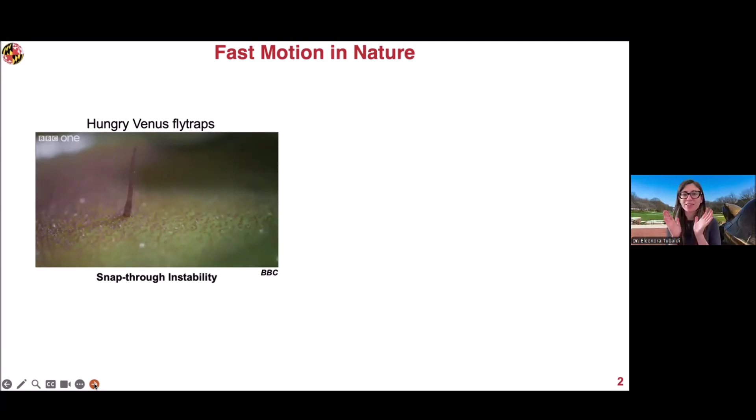So I would like to start by showing you how, for instance, nature achieves very fast motion. You might have seen a very hungry Venus flytrap that is catching its prey with this closing, locking mechanism very fast. Sometimes it's going to miss its prey, sometimes it's going to get it. But this is a mechanism that we really want to explore and try to leverage also in our designs. And this is based on a mechanical principle that's called snap-through instability. So we'll talk more about it in a second.

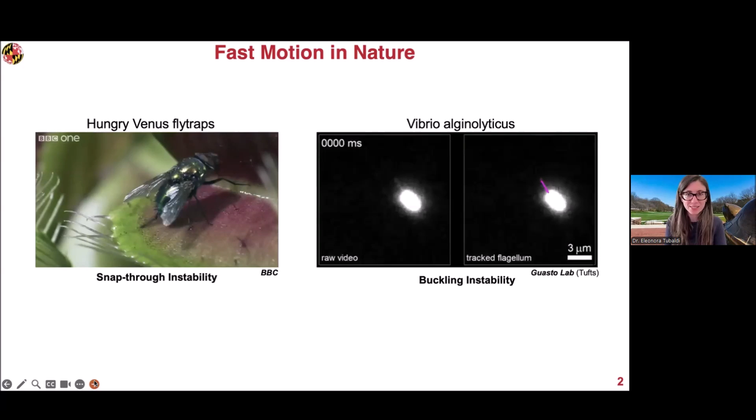And then if we scale down, we're going to look, for instance, at the Vibrio alginolyticus, where we see that this can turn very quickly, in a fraction of a second, by having this buckling instability of its tail. So nature leverages these fast reconfigurations for different purposes. And as engineers, we are interested in learning from it and including these types of principles in our designs.

So now how can we achieve fast motions in mechanical systems? If we want to use the Venus flytrap approach, like in snap-through instability, we can see a case where we push a 2D plate, and this is going to all change shape very quickly and shrink in all directions.

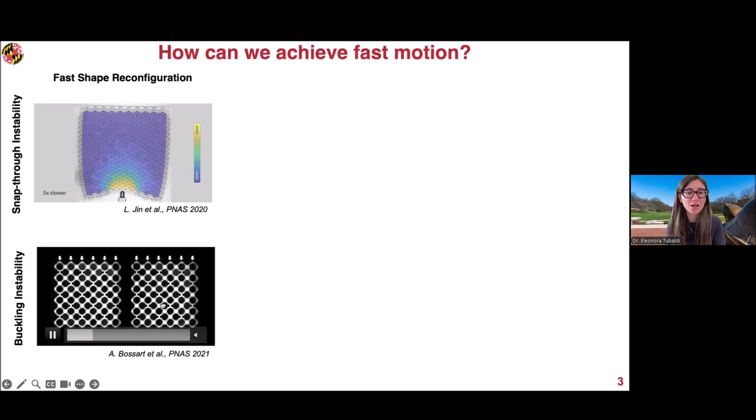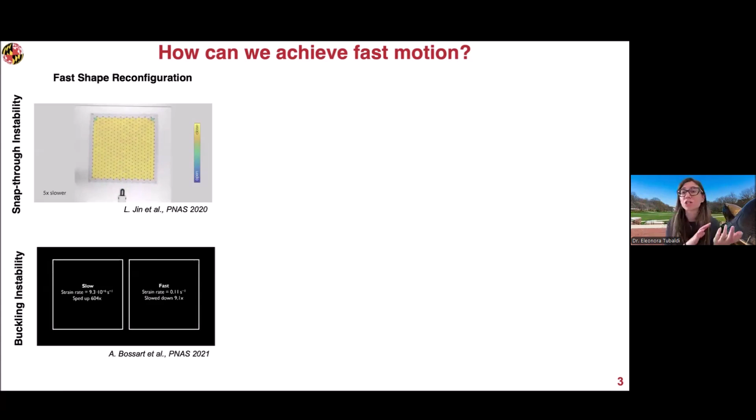Here we see another type of arrangement of materials. Once we compress it very fast, it's going to show one deformation. If we compress it slowly, it's going to change its deformation. So speed is going to play a role.

We can also include sequencing. We want to try to achieve sequential motions with very simple inputs. Here you see an origami robot, where by actuating, inflating and deflating it with different sequence orientation, we get to different target shapes.

At the bottom here, we see by cutting a material with pores inside, this is able to change its angle on how it's attached to the base. So friction is going to change, and locomotion can be achieved and programmed in the material. Here you see the example of locomotion of the soft robot.

We also want to achieve gentle grasping. Achieving something very fast but gentle at the same time is an important challenge we have in our designs. So we can use the snap-through instability, like we've seen in the previous Venus flytrap case.

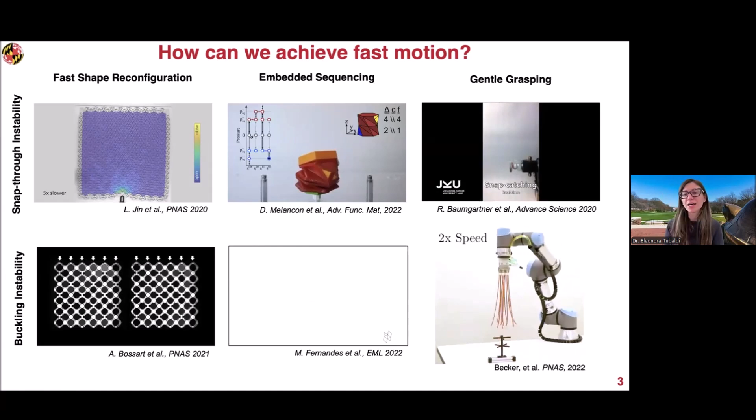And also buckling for this curly type of grasping task, where filaments are actuated upon deflation, and they all curl because they are not symmetric, so they bend one way or the other, and this enables achieving different touch points and grasping complex objects.

So we see that this gives us a lot of possibilities in the design of shape-changing materials, embedding sequencing, and gentle grasping. We would like to advance the research and the field in all these different areas.

So we ask ourselves, for instance, how can we achieve this programmable shape reconfiguration by leveraging a principle in geometric frustration? We're going to see in a second what I mean by that. We would like to achieve sequencing capabilities.

So when we inflate a material, it looks like a balloon, but it's an intelligent balloon. It's something that once it's inflated, is going to be able to trigger different touch points and interact with different objects. And then we want to achieve also gentle grasping.

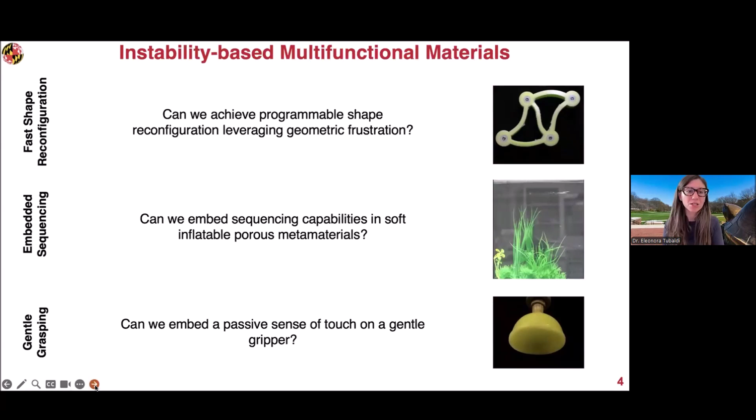And while we're grasping an object, we also would like to sense, to learn something about the object. So we're going to talk about these three different projects to give you a flavor of what's going on in our lab.

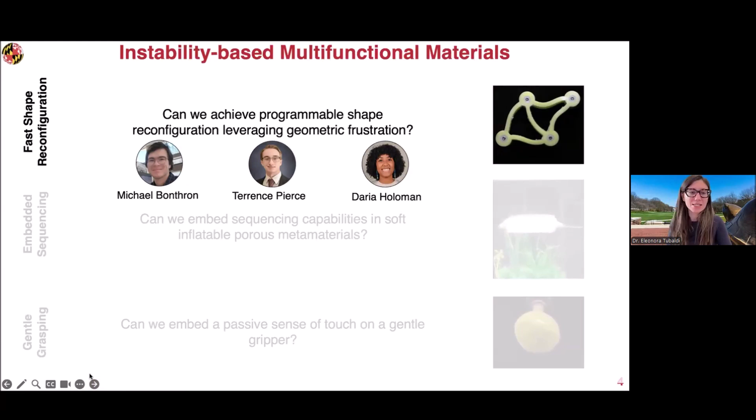In the first topic, we have three students working on it: PhD students Michael Bonthron, Terrence Pierce, and Daria Holoman as an undergraduate student. So now, what is the snapping I was talking about that the Venus flytrap uses?

It's like storing energy, like we can do when we eat an apple, and then we want to run. In the same way, it's like when we compress a spring and then release it all of a sudden. There's a lot of energy stored there.

And this is going to give us a fast reconfiguration. It's the same thing when we have a ball at the top of a hill. We give it a push, and it rolls down, changing its potential energy from when it's high up on the hill to when it's down the hill.

So we can use the same principle in designing structures. If we start with a flat plate, it doesn't have any potential energy. When we start compressing it, now we see that we have two minima where the structure wants to be, either up in this case or down in this other case.

So how is it transitioning from the top to the bottom configuration? It's going to go through an unstable state. You see here this shape that is like a sine shape, going up and then down. If we look at the potential energy here, we're higher up, and then we go down to the other minimum.

So this basic principle, we leverage when we combine multiple of those plates. This is what we call metamaterials. Metamaterials are materials whose properties emerge from structure rather than composition, meaning that depending on how I combine these different plates, I'm going to get different shapes.

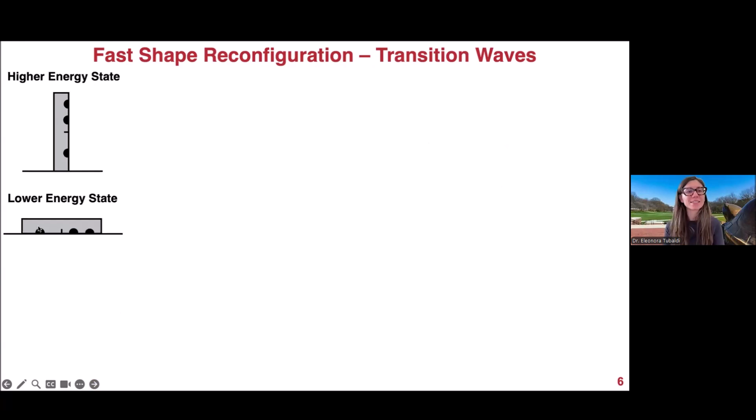For the fast shape reconfiguration, we said we're going to have a high energy state, let's say in a vertical position, like if we think about the domino, and then a lower energy state when the domino is going down. So what's happening from the potential energy perspective? When our domino is standing up, this is a higher minimum. It needs to overcome an energy barrier, increasing the potential, and then fall down into the lower energy state.

What happens if we put one domino next to the other? There's going to be a chain reaction. We push the first element, and all the others are going to fall down in sequence. If we look at the energy profile of each single element, once the first one falls down, the second one starts falling, and so on and so forth.

So we want to embed this chain reaction, this shape-shifting mechanism, into our system. People have studied this, for instance, with different plates combined in a 1D arrangement with magnets. When you push on one magnet, all of them trigger the response. Same with this rotating square, or with this spring-loading mechanism, where touching the structure makes it all change shape.

So why do we like this very simple actuation? Because these things can be deployed, for instance, in exploratory missions on new planets or in underwater systems.

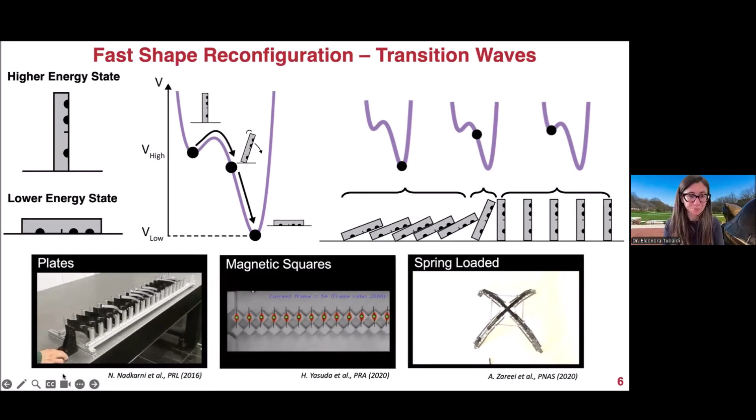What we want to do here is combine these different building blocks, these different dominoes, blocked in different arrangements. They can all be asymmetric, like the one we showed, domino up, domino down, or they can all be symmetric, like the plates I was showing in the initial snap-through.

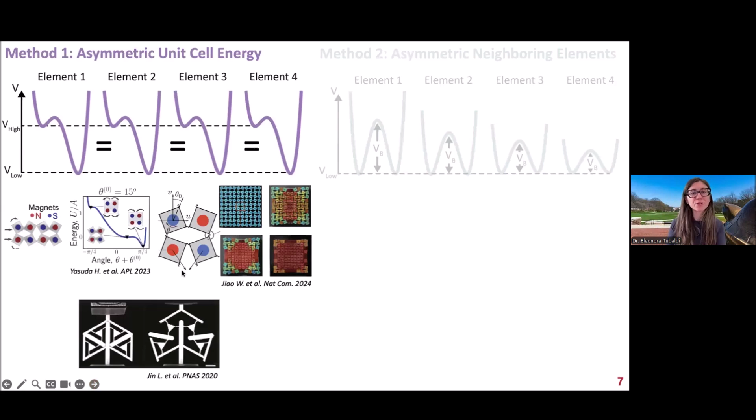So what is the difference? In the first case, we go from a configuration up to a configuration down. In the other case, we have this gradient, where the energy barrier, the amount of energy needed to jump from one state to another, decreases. And we have different examples for all of them.

Now, what are the drawbacks? In the first case, we need to have this asymmetry in the energy wells. In the second case, we need a finite size, because overall we keep decreasing our energy barrier, and eventually we won't have these two stable states anymore.

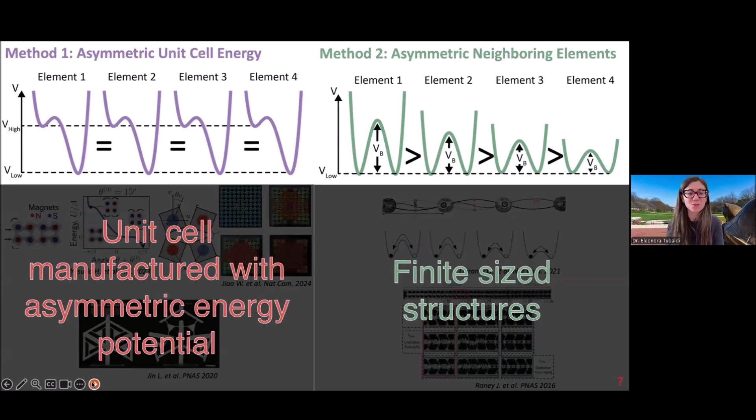So then we introduce this concept: can we use the arrangement, and in particular geometric frustration, to transition from one stable state to the other?

We start with our buckled beam, the beam that we compress, and then we arrange it, tessellating it into triangles. Triangles are very peculiar, because we can have one beam that's up, one beam that's down, and the third beam doesn't know what to do, because it's feeling these different constraints.

The same thing happens in the reconfigured state, where we still have triangles. And in jumping from one to another, we release energy.

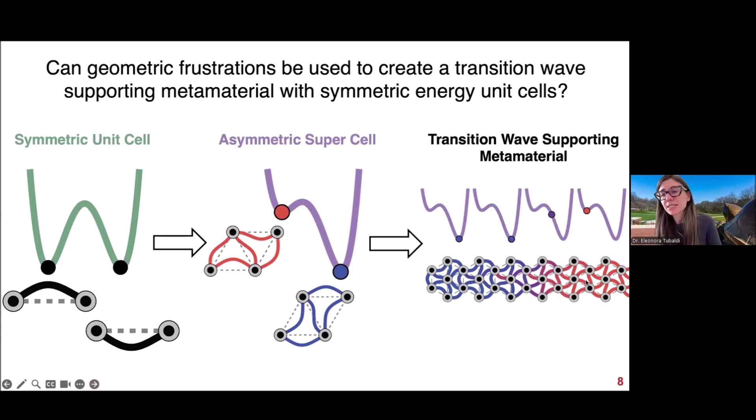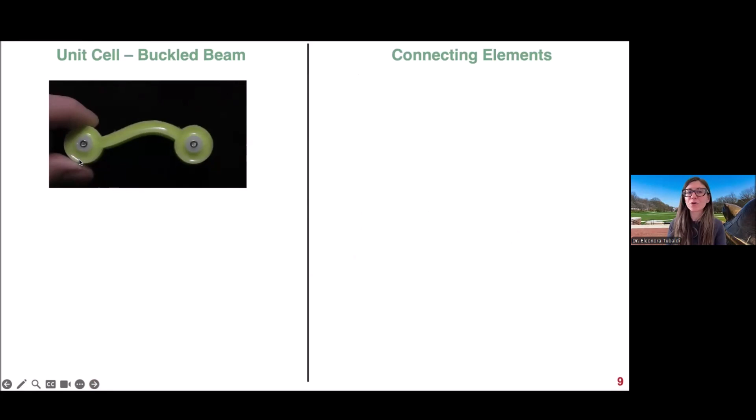So what we want is a shape-shifting material where we give an input on the first elements, and then it all transitions, like the domino effect we showed before. We start with our beam and see how, by rotating on one end, it jumps from one stable state to the other. And we see that this is all symmetric.

Now, what happens if we put multiple of these beams one after the other? We see that by actuating one, the second one follows, and we can propagate this through chains.

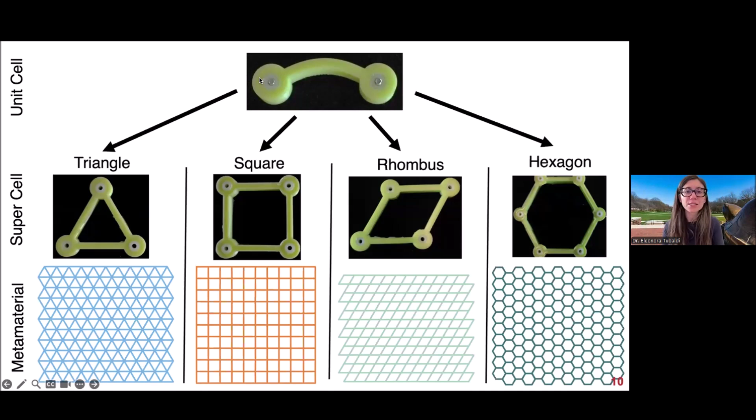So we can become really creative. The beauty of metamaterials is that everything depends on the arrangement. We can create triangles, squares, rhombus, or hexagon materials. And then when we go at the metamaterial scale and build these large networks, we can have all different arrangements by using the same building block.

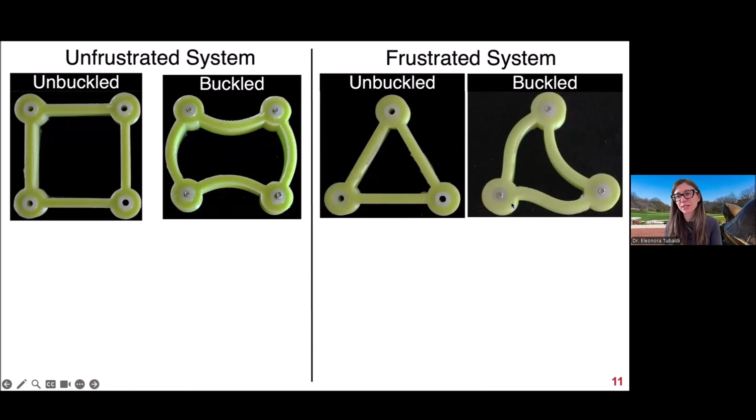So in the initial state, this is unbuckled, so it's a straight square and a straight triangle. And then when we put them in the supports, we see the buckled state. This one is going to be up, down, up, down. And when we do the same for the triangle, that's where we see the frustration coming up, because this one is up, this one is down, and the third element doesn't really know what to do.

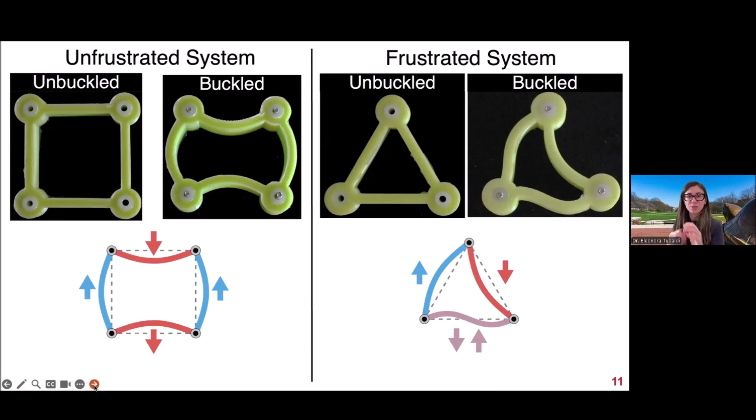So this is like the spins in electronic materials. We want to be able to use more energy that is stored in the system to release it for propagation. So here are different configurations we can play with.

We have an asymmetric configuration, and then we have geometric symmetric configurations, which we recognize by the different axes of symmetry. And then we can become creative by increasing the rise, so we push the size of it.

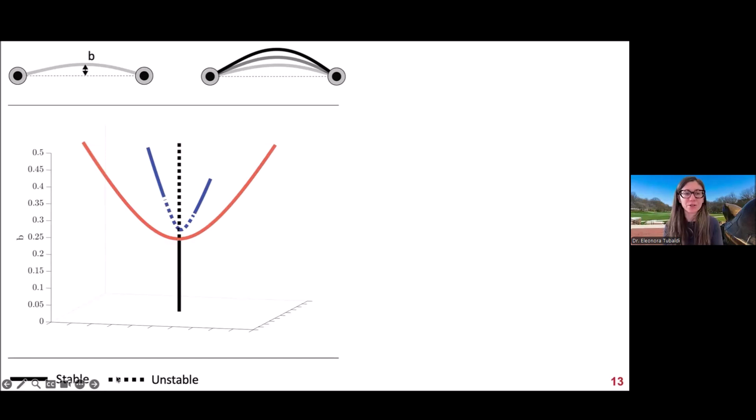So we see how the height B is increasing, and we see what are the different stable states. Initially, the structure is in a 0 state, then it gets into the asymmetric state, and then finally it gets into the symmetric state. So we can control which state we are going to be in.

So we want to go from the high energy well, the high energy configuration, to the low one. We can be very creative in the arrangements, and think about different structures and different topologies.

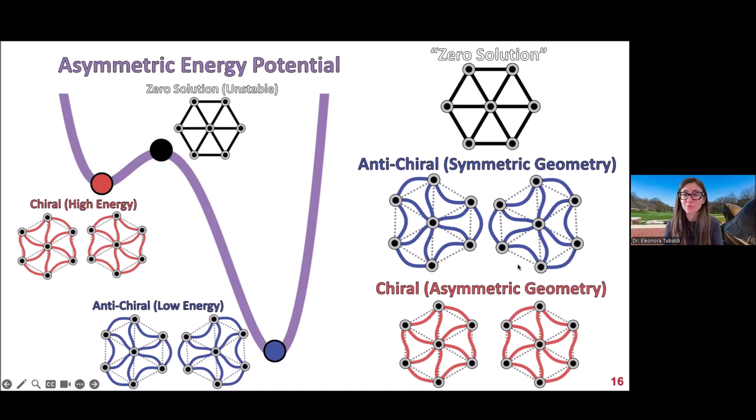So we study the hexagons, and what we see is that depending on how we arrange them, we get chiral and anti-chiral arrangements. Depending on how we actuate them, whether we push or pull, we see how the structure changes shape, either clockwise or counterclockwise. So we end up in a lower energy state configuration, but we also gather information about the inputs.

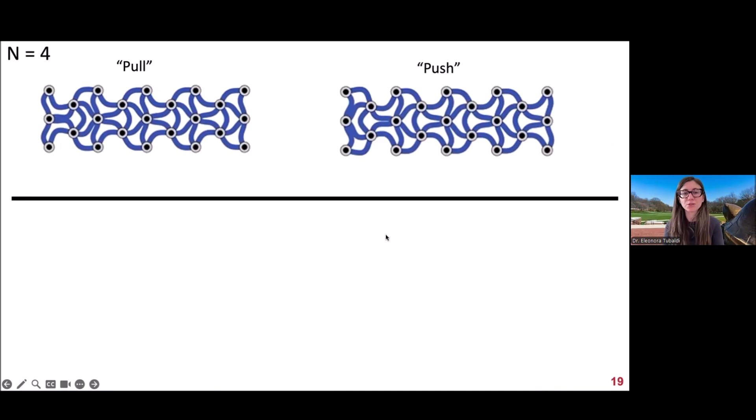So here we see an arrangement with 4 unit cells. We pull on the first one and push on the second one. And then we can expand that to 20 unit cells, and you see how the wave is propagating.

Initially everything is red, and then we see the wave profile turning blue, sequentially actuating. This is happening just because we arrange these elements in this specific topology. We are only actuating, pushing or pulling, the first elements on the left. This is interesting because it gives us a way to guide a wave through the structure.

Let's say we want to protect a payload. We're going to put this material all around the payload. So the energy is going to be dissipated around it, and it's going to keep our payload safe.

So in this way, we learned how by arranging very simple units, we can actually gather very intelligent behavior and program the transition front. Another interesting aspect of these structures is that they store memory.

Even if we don't see the transition going on, if we set our material in one state and there is an excitation coming, that could be a displacement or a temperature change, then we can look at it again and get information that something happened to the material. So those are all intelligent behaviors that we want to be able to embed into our structures.

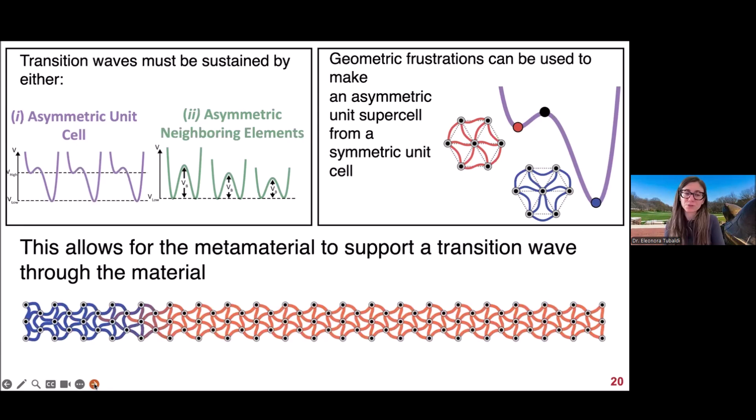So with this, we conclude the fast reconfiguration part of the talk.

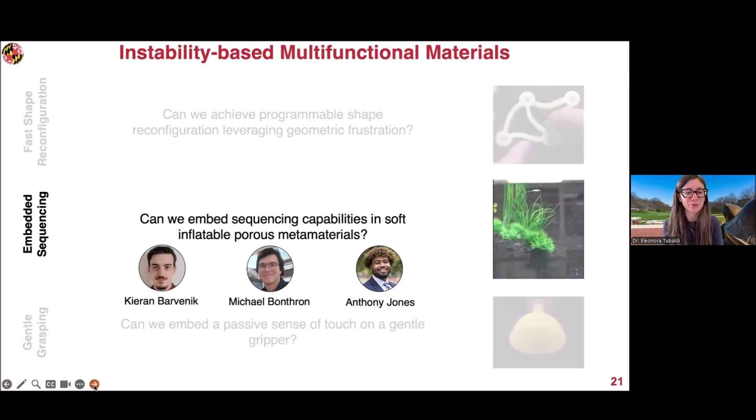Now we're going to talk about embedded sequencing into soft porous materials, in a way that we have a soft robot that can sequentially perform different actions. I would like to thank the PhD students Kieran Barvenik and Michael Bonthron, and the master student Anthony Jones from our lab. Now let's talk a bit about buckling-based metamaterials.

And the end result is that this material is going to shrink in all directions. So it has a negative Poisson ratio, which is why it's also called an auxetic material, because typically when you compress a material in one direction, it's going to expand in the other directions. But here you can see that everything is going to be shrinking down.

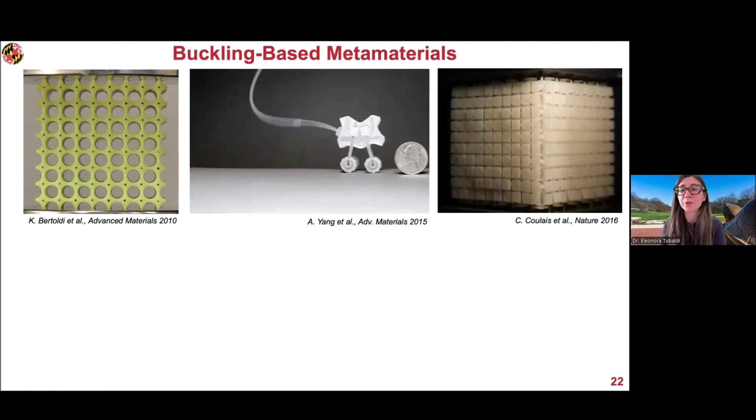So here you see all the actuations are based on deflation or compression. Now we ask ourselves, can we inflate a material? Can we really inflate it, like a balloon? This is the traditional rubber I showed you—when you cut a piece out of it, like a slice, you'll see that it's all full inside.

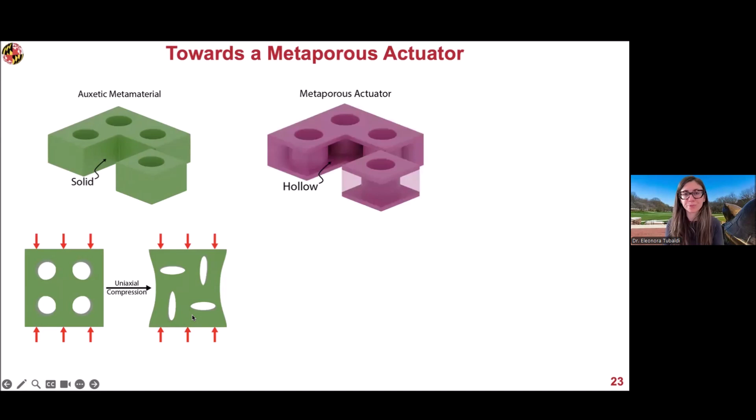So the pores are going to reconfigure, change their shape, and become like ellipses—one ellipse horizontal and one vertical, and the opposite in the lower row. Now what we want to create is a cavity inside this material, so that we can actuate it with negative pressure, like in the other examples, but also with positive pressure.

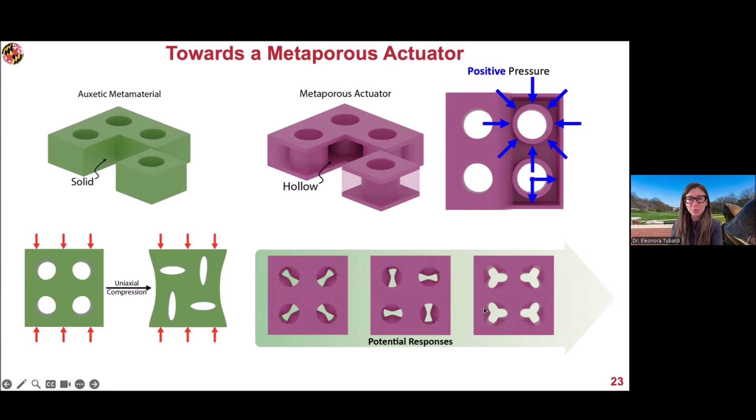So why do we want to inflate this balloon? Because we can get different potential responses, like diamonds, alternating ellipses, or three lobes, like a flower mode shape. To achieve that, we started thinking about the structure, and we manufacture it in a way that we can just inflate it with a single input, and then the pressure is shared inside the cavity.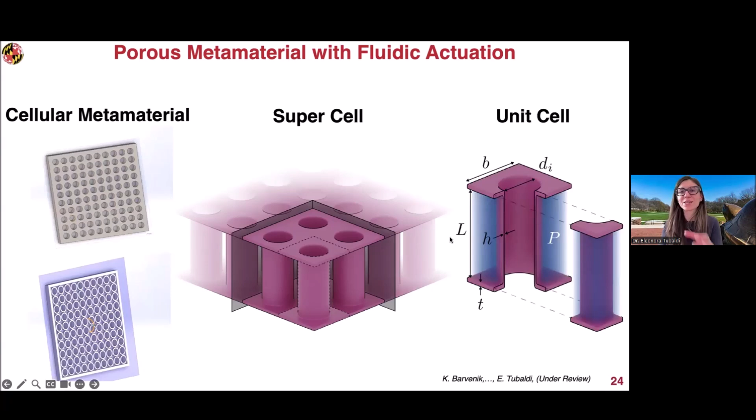If we look at a piece of it, we can see it's like a 2x2 arrangement, with a single cylinder and plates at the top and bottom. So we started looking at what the global shape would be, and we see that we can have diamonds—we introduce these diamond reconfigurations.

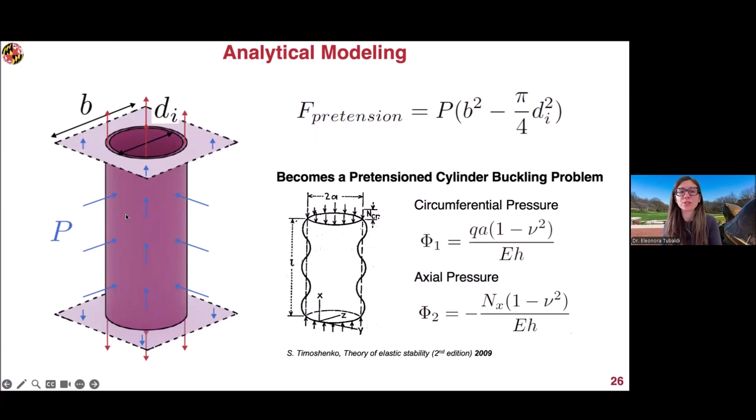Then we look at how we can predict the behavior. We use equations to identify the critical pressure at which the shape change is going to happen in our material. We also use finite elements, numerical simulations, to predict the response. All our research is based on analytical, numerical, and experimental components, because we want to be able to predict how the structure will behave under different pressures.

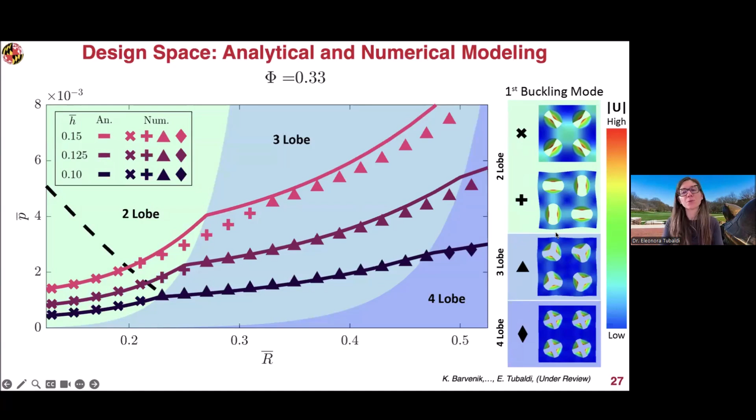In this way, we can find the critical pressure at which the structure changes shape. We also do experimental validation—just by changing the height of this material, we get different responses. Here we got a diamond mode shape. If we make this shorter, we get alternating ellipses, and if we make it even shorter, we get three lobes, a flower shape.

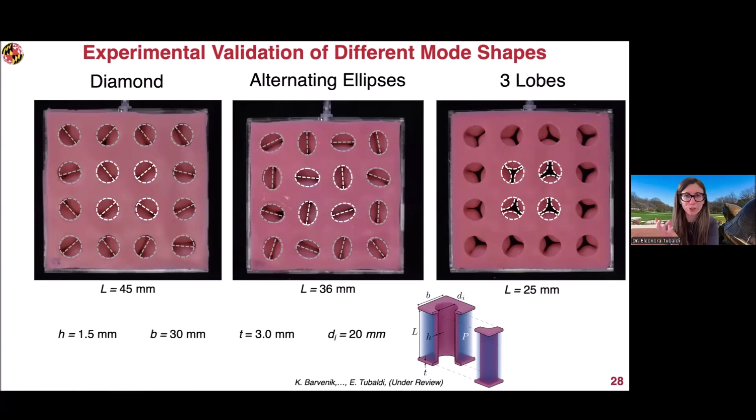So with different heights, we get different pressures and different deformations of our special balloon. Now we compared what we get experimentally and what we see numerically. This colored version of the metamaterial at the center is what we predict numerically, and on the right we're plotting how the volume inside the cavity of this balloon changes versus the pressure, comparing analytical, numerical, and experimental results.

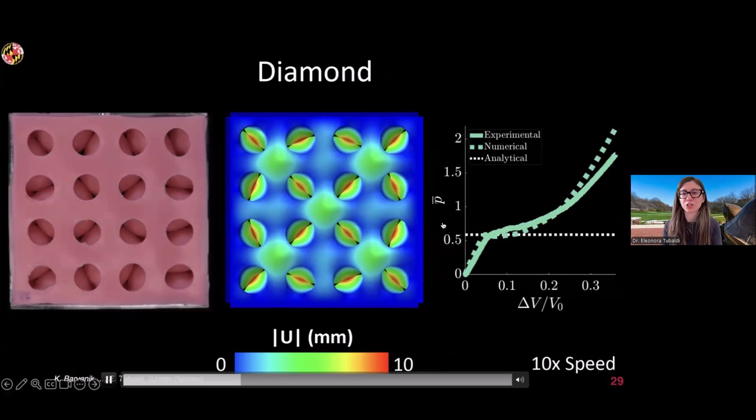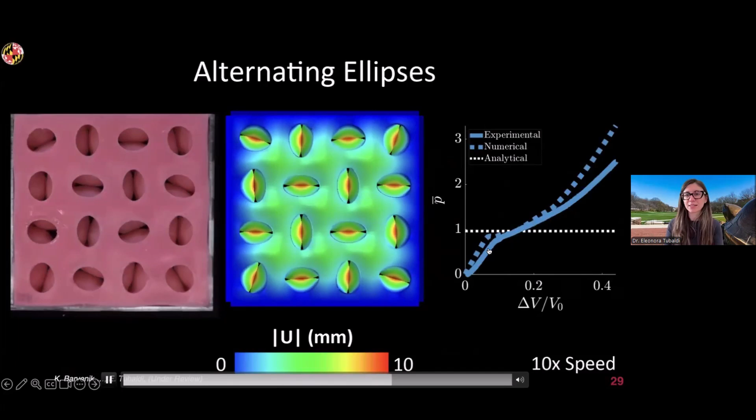So we see all three different regimes: the diamond that emerges at a critical pressure of 0.5, a non-dimensionalized value, then alternating ellipses for higher pressure, and finally the three lobes for even higher pressure.

So we see that we can control the deformation here, and we got very good agreement within the numerical and experimental results.

So now we want to use it for soft robotics applications. Why do we think this is interesting? Because we have the collapsing of the pores that represent different touch points, and these different touch points are a different way of having an actuation mechanism.

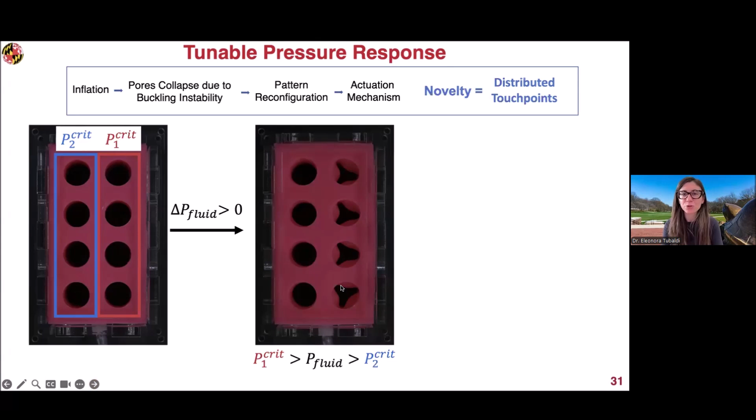So something we can do is to make a critical pressure on one side of the structure and a different one on the other. So when we inflate our balloon for a pressure that is in between these two critical pressures, we will have only one column that is going to deform. And then if we keep increasing it, both columns will respond with different mode shapes.

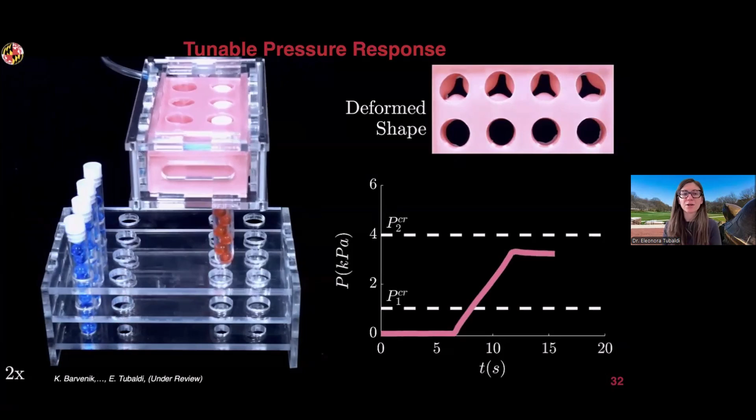So what we decided to do is to grab test tubes. Here we are inflating our material between the two critical pressures in a way that we're only going to grasp one row. So just by setting the pressure between P1 and P2, we say okay, we just want to grab the red test tube column, and that is exactly what happens because the column on the left is now being deformed.

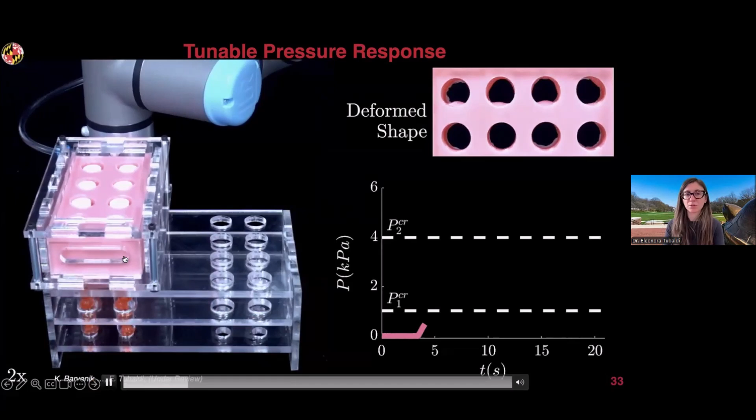Now if we want to grasp both columns, we increase the pressure above the highest critical pressure. So with a single input - it's just a balloon that we inflate and deflate - we can selectively grasp different portions of the structures we are interacting with.

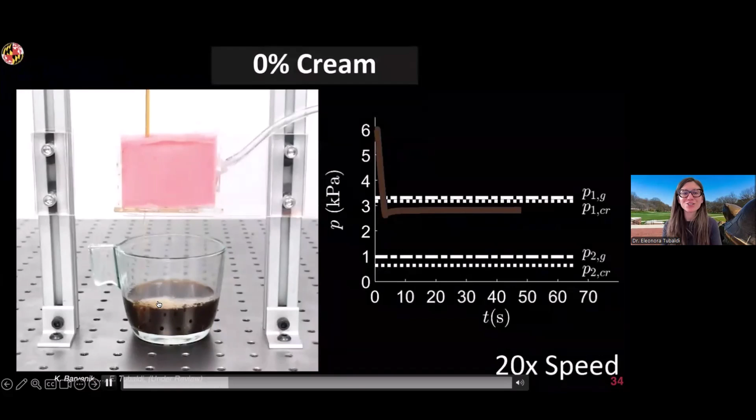So we then decided to look at a smaller sample with only two pores, and we decided to use it to mix coffee and cream. Here we have two different pores where there are two different tubes that go through it. On the left there is coffee, on the right there is cream.

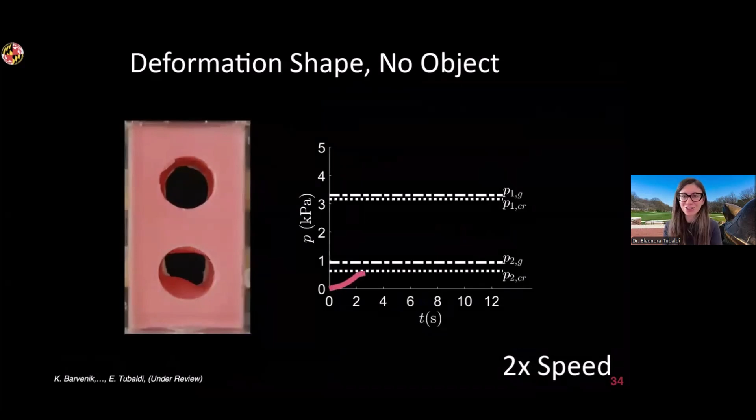Depending on how open or how closed they are, we can get different percentages of coffee and cream. We like to call this the barista material, because this can give us different percentages of coffee - each of us have our own preferences - just by controlling the opening and closing of these pores. So we actuate only these cavities, and then the material is going to do the rest to do the mixture that we like.

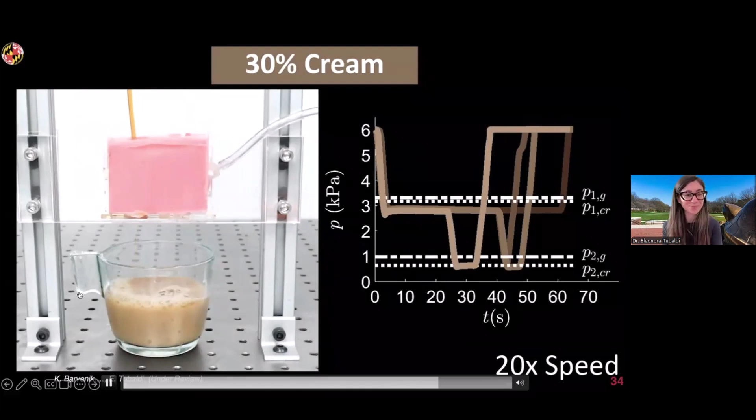So in this way, we show that we have different shadings, from black coffee to coffee with cream, and we can control the ratio between the two - so in a way that we can control the fluidic mixture.

Of course, we can expand this to different fluidic components. Here we just demonstrated with coffee and cream, but you can think of having a lot of different fluids that you want to regulate. So this material gives you the opportunity not only to grasp objects, but also to do fluidic control in a variety of applications.

Okay, great. So with this second part of the talk, we went over the sequencing capabilities of soft intelligent materials for soft robotics applications. And now the last one I want to talk about is gentle grasping, but grasping with a sense of touch - so being able to grasp objects and getting information about it.

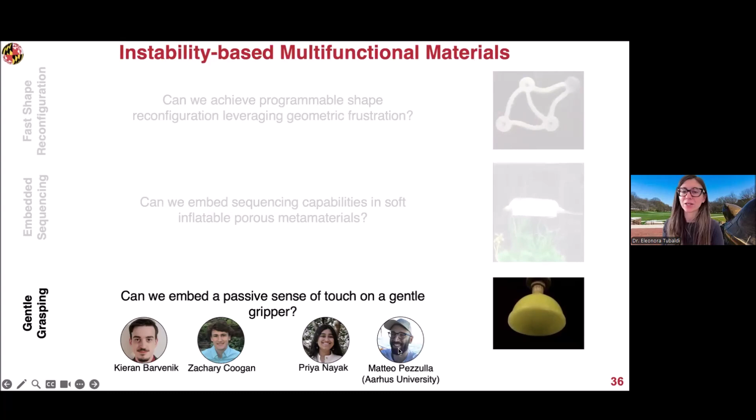So how can we achieve gripping, and in particular soft gripping? There are different strategies.

So the first one is to use a granular material gripper. Here you see this granular material that is inside the soft balloon, that is being deflated. Once it's deflated, this is compacting all around the material, so it's going to allow that to grasp it and move it around. It becomes very rigid once deflated because all the granular material becomes super compact and stiff.

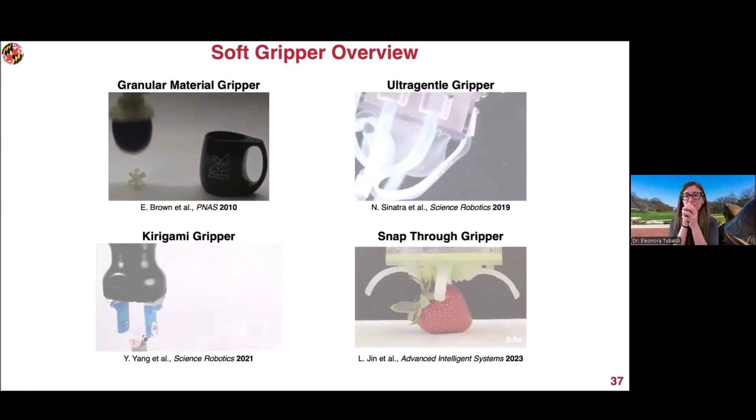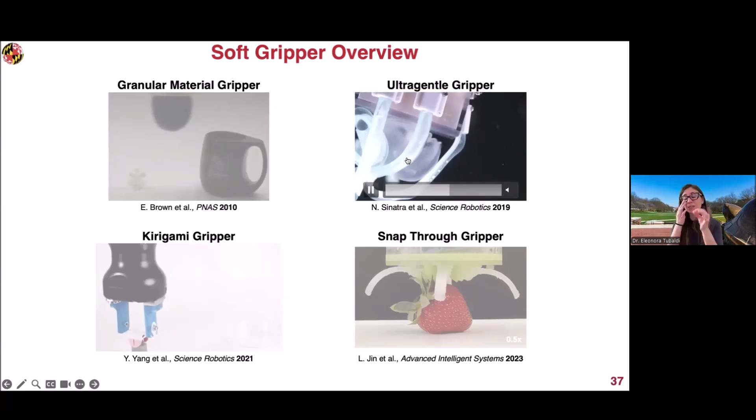Another strategy is to use this gentle grasping. Here you see these thin filaments where there is a cavity inside and the beam is asymmetric. So when we deflate it, that is going to bend and can grasp a jellyfish that is an extremely delicate and fragile animal.

And then another approach is to use kirigami. So in kirigami, we make cuts on thin plates, and then we pull them to see how the deformation can go out of plane. Here we see there is a cut at the center of this material, and once we pull it, the two sides are going to bend. So this is then able to grasp different objects.

And then another strategy that we can use is the snap-through, again like we said at the beginning with the Venus flytrap. In this case, there is a shell at the top, a dome that is being deformed up and down, so these appendices then can wrap a strawberry in a very delicate and gentle way.

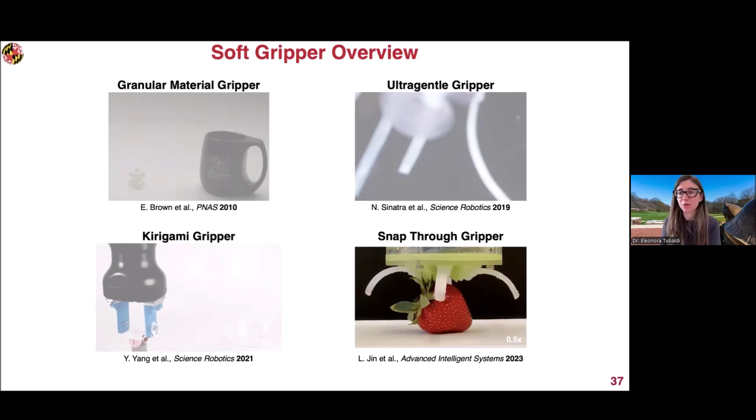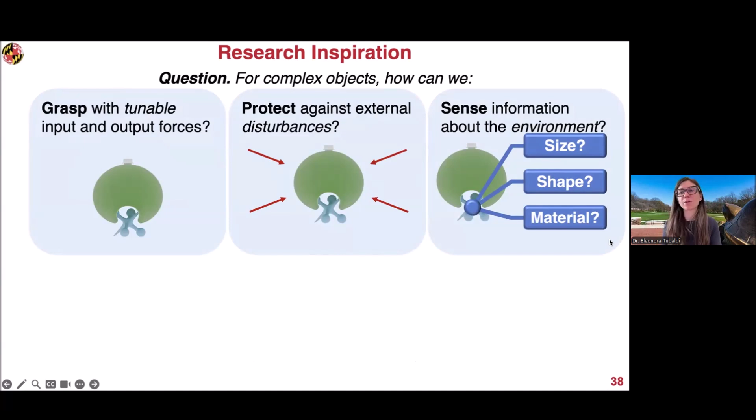So these are all different strategies that can be used for grasping objects. So something we wanted to achieve is to get complex object grasping, and in a way that we can tune the force output, we can protect the objects, because oftentimes we want to be able to encapsulate the object and protect it from outside. And then we want to be able to sense something about the object. So maybe what about size, shapes, material.

So again, we turn our attention towards nature. So we thought, okay, what can we do? So one of inspiration was a Pac-Man that can grasp objects. And nature, what it does it is with this tunicate that is a deep sea creature that is made of a siphon that is going to open and close this gigantic mouth to feed himself. So inspired by this mechanism, we developed what we call our Pac-Man gripper.

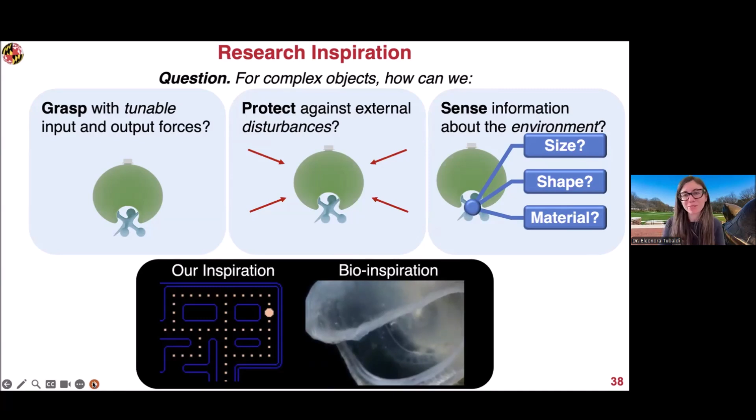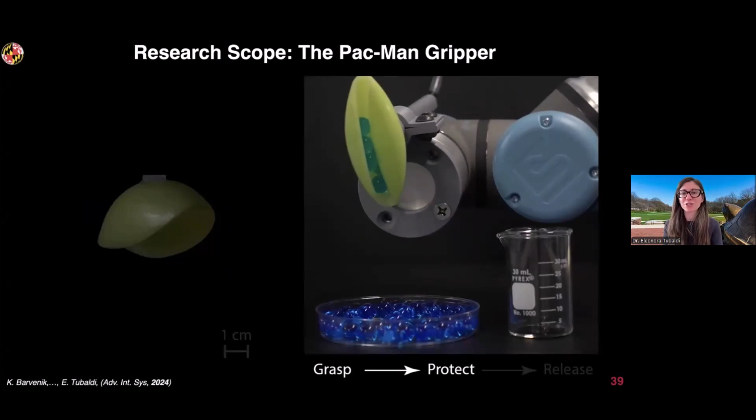That is this dome, basically, where we have a cavity inside and a very soft deformable layer at the base. So once we deflate it, we can get to grasp, for instance, here we have Orbeez that are wet, so they're very tricky to grasp with our hands. So here we showcase that we can turn it in a way that is super safe and is very reliable as a mechanism and get them to move around.

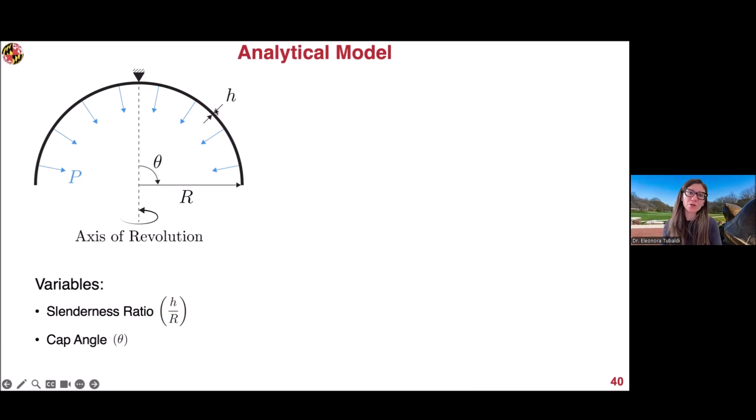So we studied how the deformation happens. So everything will depend on how thick this shell at the top is, and then how tall overall the shell is. I'm going to skip over the math, but if you have questions, feel free to ask. Well, why we do this? Because we want to be able to program what is the critical pressure at which we are going to get the deformation. So we always want to be able to control our structure and its response.

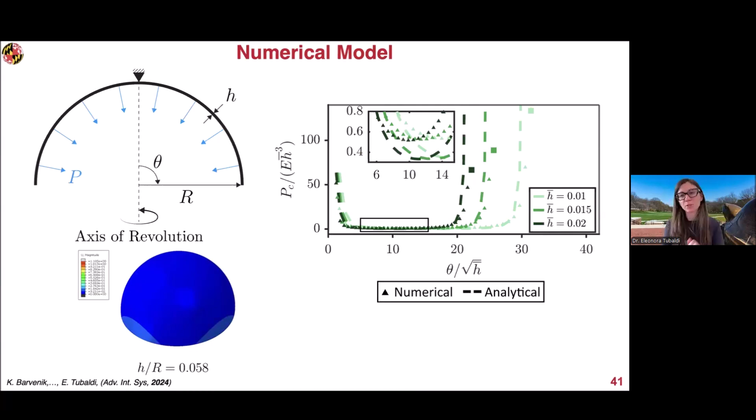So we do simulations to see how the deformation happens in a way that we get our Pac-Man shape, because we want to be able to encapsulate objects. So we need to wrap our dome around those objects. And there are some plots where we control what is the critical pressure versus the non-dimensionalized thickness of the shell, and also with respect to the cap angle. So there is some digging and design space definition so that we know, depending on which application we want to target, what type of behavior we want to expect.

And this is our gripper geometry. So it's a very simple dome with this thin membrane at the base. So what are the geometrical features that matter? So this is going to be the ratio between the thickness of the dome and the membrane, and also the film thickness divided by the radius. So we design these domes to go through all different pressure levels, and we see which ranges we get. And then we identify different regimes.

So this is to demonstrate to you that we cannot take any dome and any membrane at the base to get the Pac-Man shape that we want. There needs to be a specific ratio between them. So we can be in different regimes. So if the membrane is too thick, then the dome is not going to have enough force to go in the Pac-Man shape, and it's going to buckle with this dimple.

Then if the ratio between the thickness of the membrane and the thickness of the shell is in a regime where they can compete, then we get the Pac-Man. That is what we get as constructive buckling. And then if the membrane is too thin and the dome is too thick, once we deflate it, the membrane is going to just be absorbed.

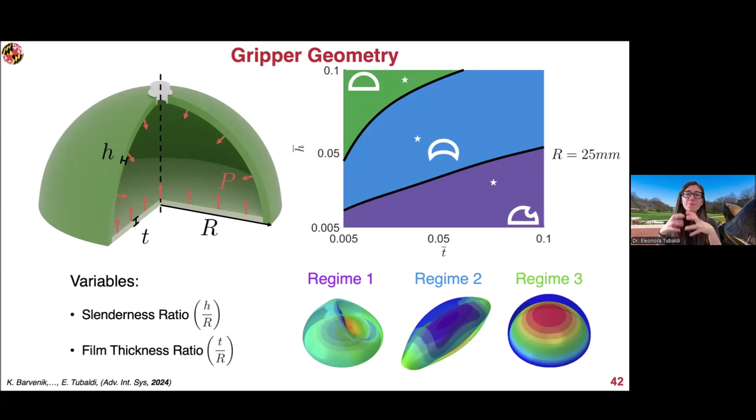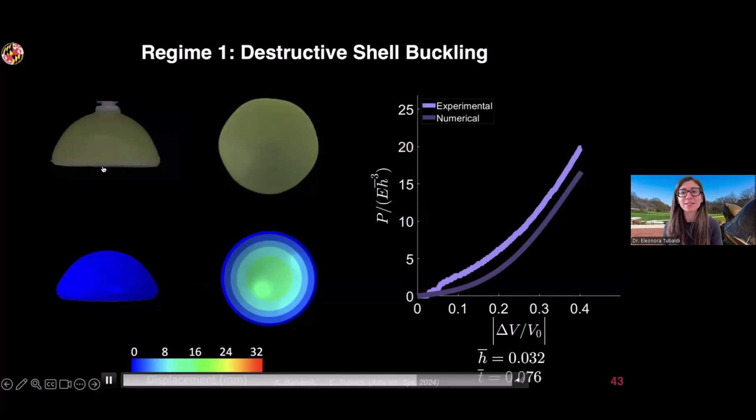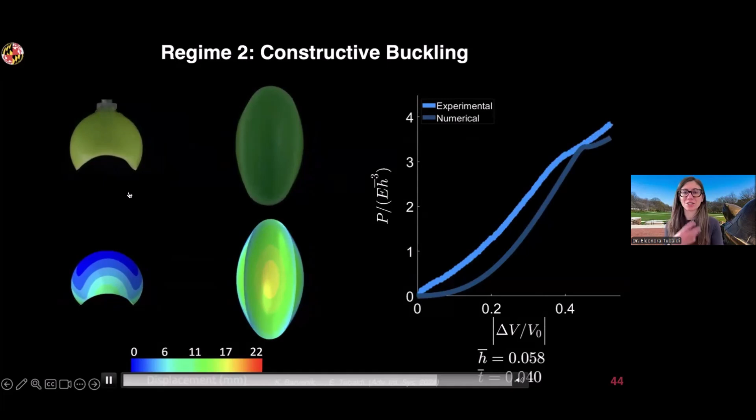And that's when we see that both the dome and the membrane at the base are gonna cooperatively buckle. And we see how the shape is gonna change, and this is gonna be functional for our grasping purposes. And we'll always compare how much volume we need to change versus the pressure that we measure. And then the last case is not very interesting because we just see the membrane going up and the dome being too stiff. So the dome is not moving because it's too rigid, the thickness was too high.

So this is to demonstrate that there is a range for the design space where we can get our interesting response.

So now what about sensing? Sensing comes when our structure, our dome, is going to impact an object. Here we see that we have three different objects: three different cylinders, one very small, one intermediate, and one big. So even if we don't deflate it, once we touch the object, the cavity is going to change its shape. The bigger the object is, the bigger the change in pressure that we're going to measure. So indirectly, just by looking at the pressure-volume curve, we are getting information about the objects.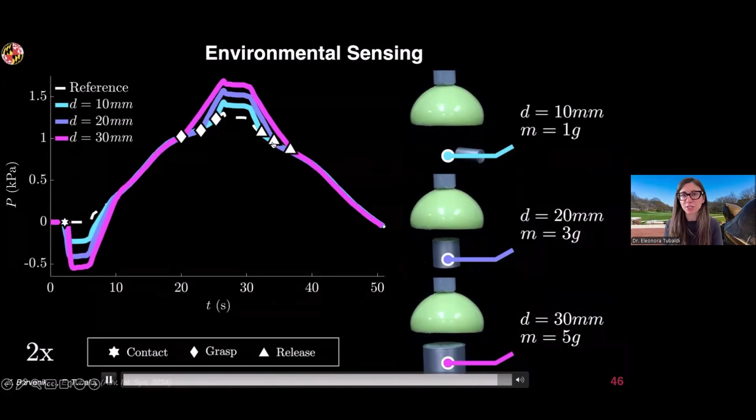So even if we don't have cameras, even if we don't see that, we can see that the fuchsia curve is interacting with a bigger object than the violet and the light blue. And we can detect important points, like when we contact the object, when we grasp the object, and when we release the object, just by looking at this one single pressure curve. So we're not adding any sensing. We're not adding cameras. We're not adding additional electronics here.

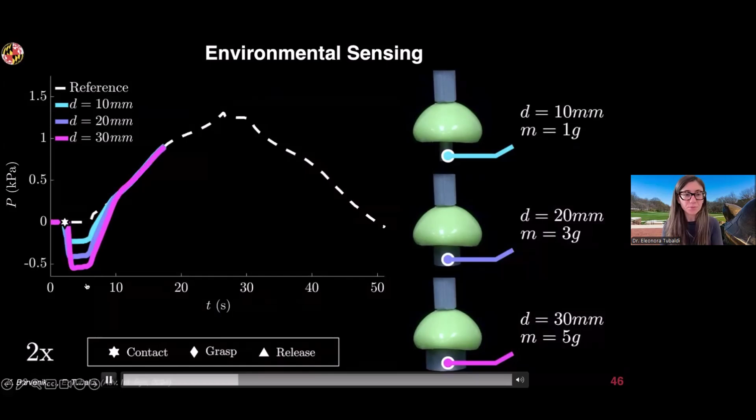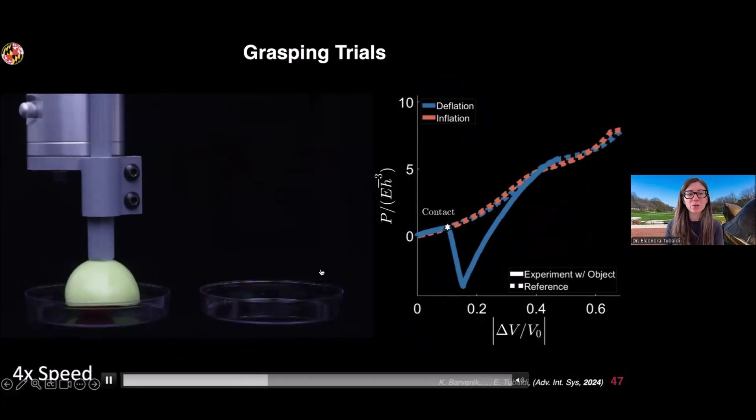So now we want to demonstrate that we can grasp lots of objects, and we can also get a sense of when we have the contact, the grasping, and the release. These are very jelly types of materials. This is a piece of tofu, for instance, and we see where the contact happens because we compare it with the curves when there is no object. We see, for instance, with a raspberry. The beauty of this is that the pressure is going to be regulated around the object, and the deformable component, the membrane, is the one that is in contact with the object.

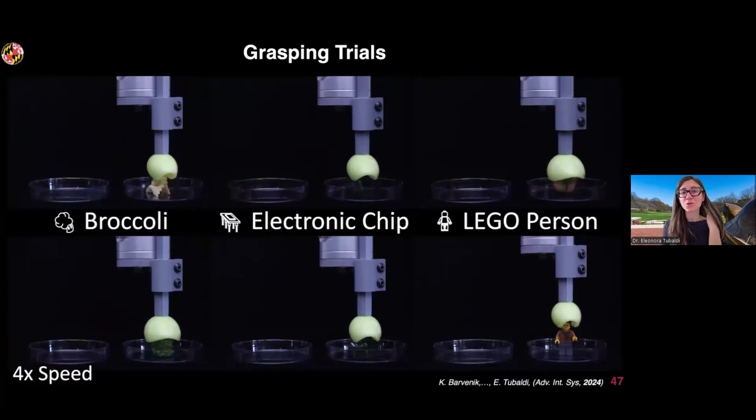We can also have stiffer objects like a screwdriver that are way bigger than the dome itself, than our Pac-Man, but we can successfully grasp it. And then here we became really creative, and we said, okay, let's try an electronic chip. Why not try a Lego person? Why not try strawberries, broccoli? So all of this, we can successfully grasp and get a sense of what shape we are handling.

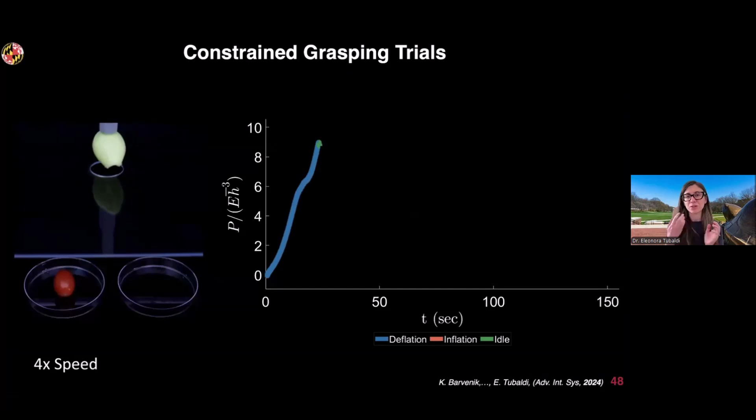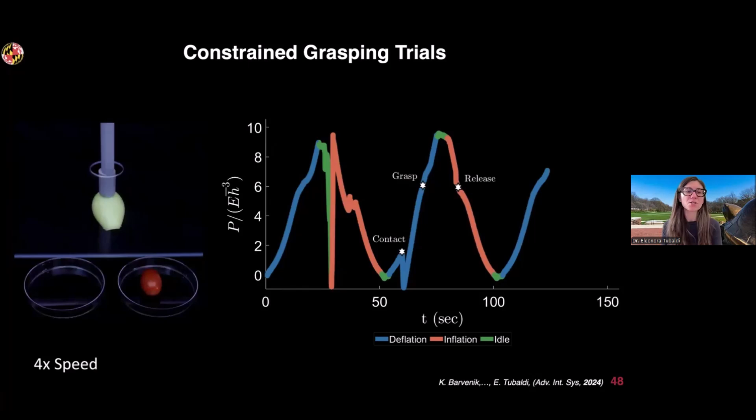As we are thinking about this soft gripper with sensing capability, we think to also deploy it for soft robotics in the biomedical field. This means that we need to go through very narrow passages. We don't want to damage tissue around us, right? So this is the ideal design because it doesn't have any stiff component on the dome and there are no additional sensors. Here we show how we can move an object from one side to another, sneak through a very narrow passage, and define where the contact, grasping, and release are.

Another application we thought about is cleaning the oceans, being able to grasp plastic sediments. Why is it tricky to grasp these plastic sediments? Because they change shape while we are grasping them, and they can be really heavy because they can carry water. The good thing about this dome is that it's going to adjust its shape around the plastic, and in this way we can successfully grasp it.

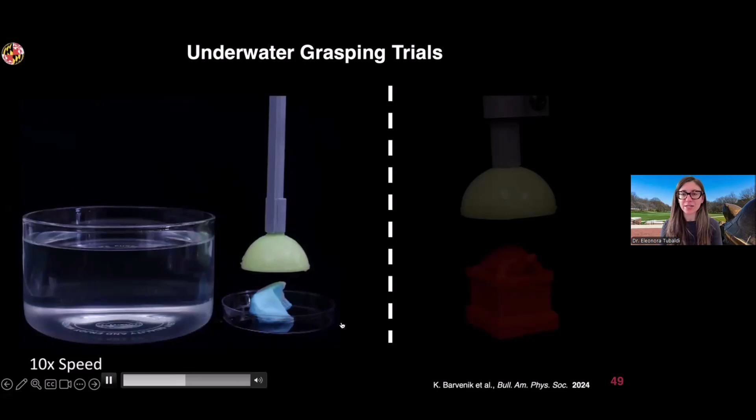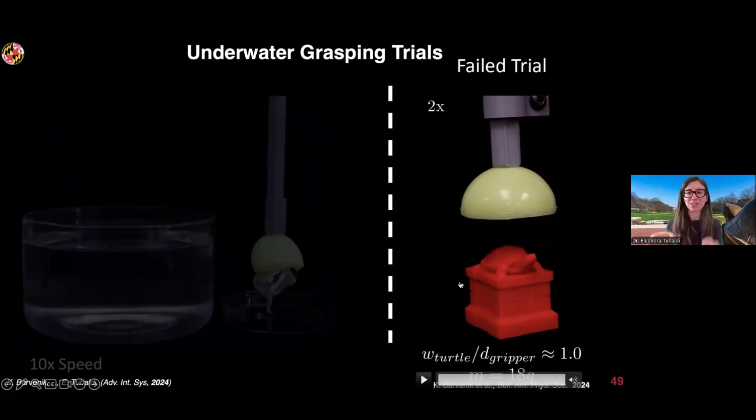Then the last test we wanted to do was with our Testudo, our mascot from UMD. We tried to grasp it and we couldn't. We said, oh no way, Testudo cannot betray us. So let's think about what's going on. Testudo has a very complex shape, with the head, the shell, different appendages. So then we said, okay, let's try to enhance our versatility here.

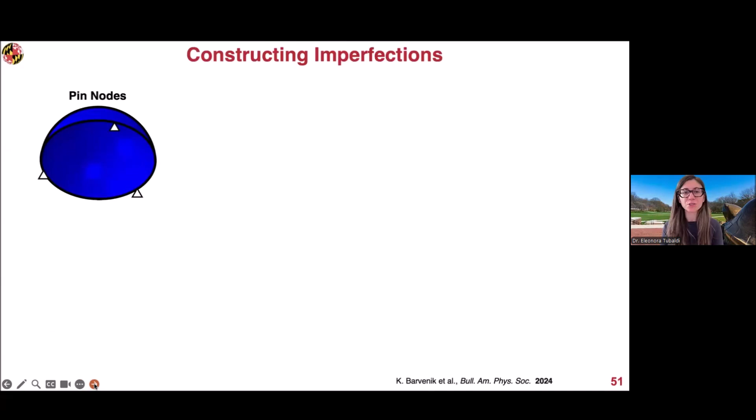Traditionally, our Pac-Man can only deform in this mode shape, right? It's going to wrap around the object. So we said, can we change the gripping force and can we change the deformation? What if we want to get more complex shapes? To do that, we started thinking of adding elastic connections at the base.

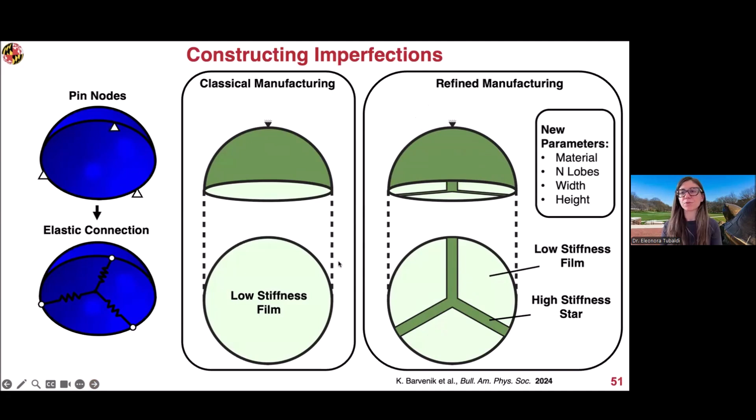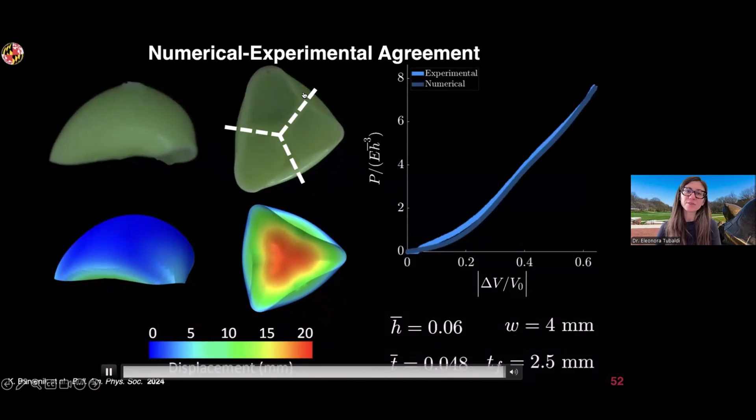This is the way we make our Pac-Man. We make the shell, we make this low stiffness membrane, and then we combine them. Now we start thinking of also using high-stiffness components in our membrane so that we control these pinpoints, and we keep the same manufacturing principle. In this way, we can control how many lobes, material, width, and height we have. These are the tests we did for the case where we have three pinpoints, with this stiffening component in our membrane.